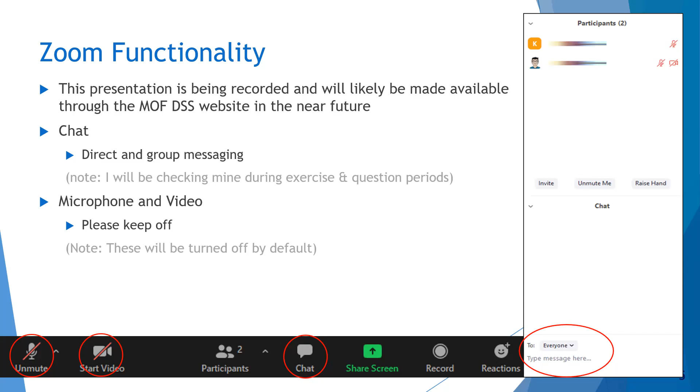So moving forward, webinar objectives. Quickly, the main things we really want to look at: first, review dam regulations. There is some guidance there as well. We want to understand the need for pre-inspection, so that's going to be a real main thing I'm going to try to drive home today. To be knowledgeable about the tools and resources to use, we're going to show you where to find checklists and things like that, and know how to document issues.

So it is a virtual inspection. What we're going to be doing is focusing on formal inspections. It is very similar to surveillance, but that is the main goal here today.

So module content: introductions, we've already done that five minutes in. Review of dam safety regulations - we're going to spend about 15 minutes looking at regulations, and then we're going to review dam safety resources and templates. So where do we find those? What do they look like? What's in them? And what can we expect? And how do we use those?

So dam inspection, review, and preparation. We really want to hammer that home - how to prepare before you go out to a formal inspection. Visual inspection exercise - that's the main core of this. We are going to go through a whole inspection and think about what do we write down, what are those things, what type of follow-up recommendation should we be making.

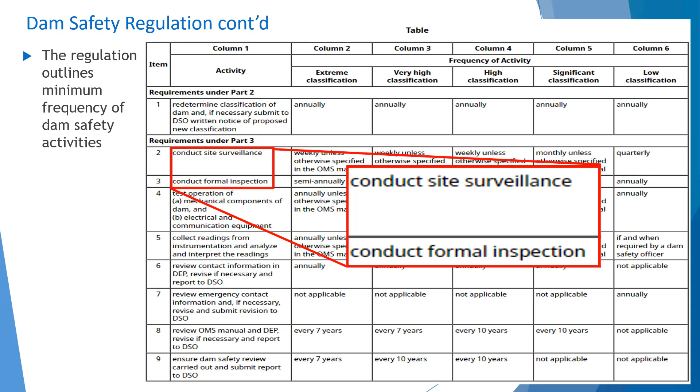That is more of a prerequisite for today. And even if you haven't done it, that's great, or that's fine. It's not going to impede on today's program, but I totally encourage you to check it out, watch those webinars back, and maybe watch this one again afterwards once it's on demand.

So surveillance inspection, right? What is it? What's the difference? Why is there this differentiation between surveillance and formal inspection? Well, generally, they're just surveillance. So the Canadian Dam Association has a section called surveillance and surveillance procedures, and it just lumps all inspections and everything in there. But we know that there's various levels.

We have weekly sort of checkups, or where we just look at them. We have sometimes video surveillance, things like that. Sometimes even flying drones out and doing it remotely. So surveillance, our dam safety regulation in BC separates out site surveillance and formal inspection.

So one is the monitoring of a dam and surrounding or adjacent area to a dam through visual observation. If there is instrumentation related to the dam, through systematic collection of that data. This might be like an operator's stop by, you stop by once a week, once a month. This is a regulated thing. You have a frequency in the dam safety regulation you should be following as a minimum, and you collect that information.

But formal inspection here is a little bit different. It is a thorough on-site inspection of the dam and dam site conducted by a person. These are right in the dam safety regulation, and it says we have to do that typically annually. But some dams it's not annually, it could be biannually, and in some cases even more, but that's a minimum.

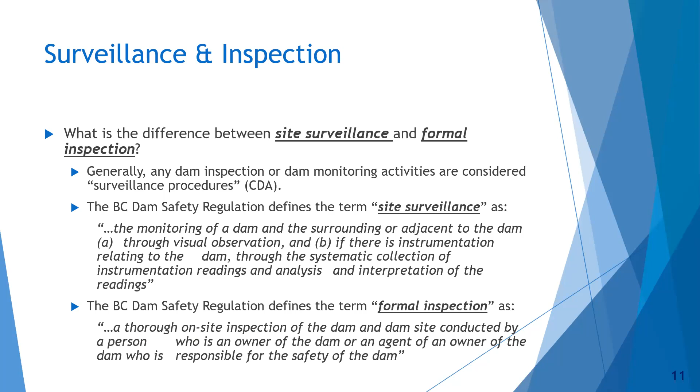Okay, so continuing on. Surveillance and inspection - there is a difference in terminology sometimes when we look at the Canadian Dam Association and our BC regulation. So the CDA just calls them routine inspections, sort of those little checkups. Our BC Dam Safety Regulation calls them site surveillance. So engineering inspections is what the CDA calls them.

We recognize that you're not necessarily engineering. A lot of owners are experienced with dam safety and are going to these webinars, and they know what to look for. You can conduct the formal inspection yourself, and our regulation calls them formal inspections, and that's it.

So we also have audits. Audits are a common thing as well. Our dam safety officers audit us once every 5 years, and so those look like surveillance or inspection sometimes, but those are not considered surveillance. That's just a check or an audit to make sure we are doing those things.

So site surveillance typically conducted by dam owner. Formal inspections, oftentimes conducted by an engineer, by a third party. Oftentimes we do them on behalf of our clients. But the truth is, the owner can do that.

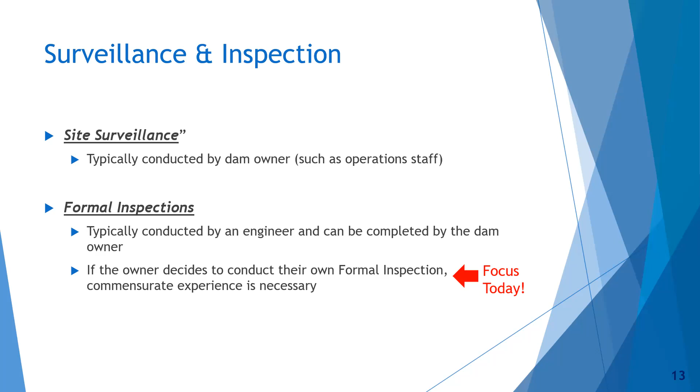So you as dam owners and operators, if you have some experience and you believe it's appropriate, you can go ahead and do them yourself. There's no requirement for a third party or an engineer to do that. Oftentimes I recommend, if you're not sure, have an engineer do it, have them walk you through it, and then they've already filled the first one out for you, and then you have a pretty good idea as to what to look for and use these resources.

So surveillance and inspection - this is right out of the Canadian Dam Association. Dam failures are often preceded by warning signs. The warning time can range from days to months to even years, or it could be minutes or hours. So without surveillance or inspection, we just never know if there's something going wrong with their dams. So we have to be surveillancing them.

A comprehensive visual inspection can identify most issues related to dam safety, and I'd say this is very true. We do comprehensive dam safety reviews, and we do geotechnical tests and drilling and everything, but the most valuable way to review a dam is often just with your eyes. You're looking for things like cracks. So I think a comprehensive visual inspection is probably the best thing you can be doing.

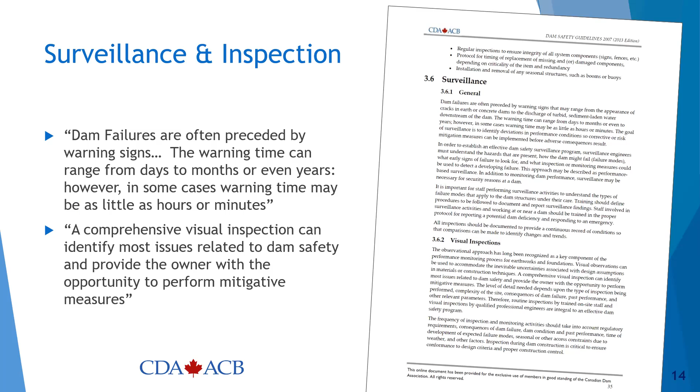And so you should really be doing it at least annually. The frequency of inspection and monitoring activities should take into account regulatory requirements, consequences of dam failure, past conditions, time of development of expected failure modes, and weather. So there's all these things we should be thinking about and have in mind as context when we go out to do surveillance or inspection. Although we're focusing on inspection, it applies to everything - these are all CDA guidance things.

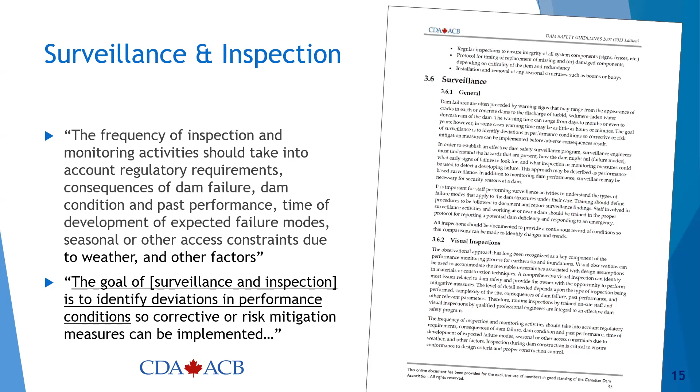Here's the goal of surveillance and inspection: to identify deviations in performance conditions, so we can do corrective measures. Corrective or risk mitigation measures can be implemented - that is the goal here. We're not talking about techniques, but we are talking about the importance of surveillance and inspection.

So lots of stuff about the dam safety management system - there's many things in there, right? We've got reporting, third-party dam safety reviews, operation, maintenance, surveillance, emergency preparedness. We've got all kinds of things, right? And so we've just highlighted surveillance. Surveillance is just one piece of that puzzle.

And surveillance and inspection might be the most important part of your policy. So that's something we just really got to be doing. So we're going to be doing one today.

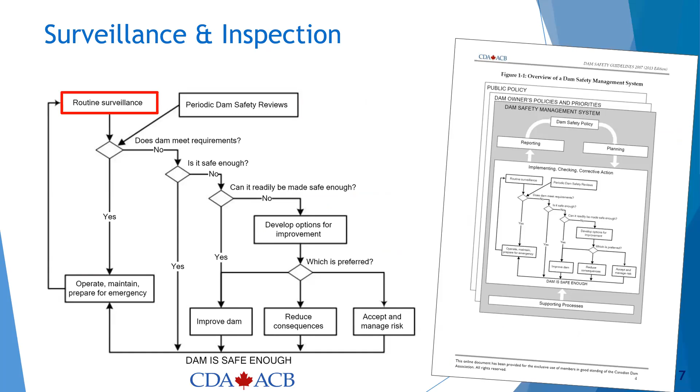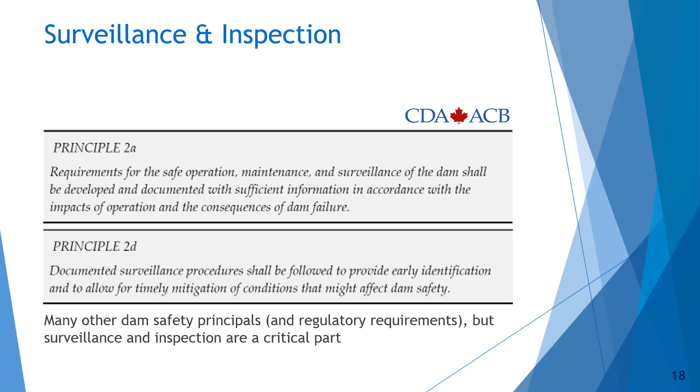Again, this is just another slide to show you the overarching picture. Our dam safety management system includes many things, many things. But routine surveillance is right there at the top - it often is one of those links that keep everything together and working. And there's principles in the Canadian Dam Association, and good reasons as to why we should be doing these things. So I'm going to keep moving to stay on time.

So dam safety regulation, going back to that - we have that table of activities based on your consequence, which we reviewed last week. You can see the frequency that we need to be doing things - oftentimes weekly, quarterly, and so forth. We see conduct site surveillance in here, and oftentimes it's annually for inspection.

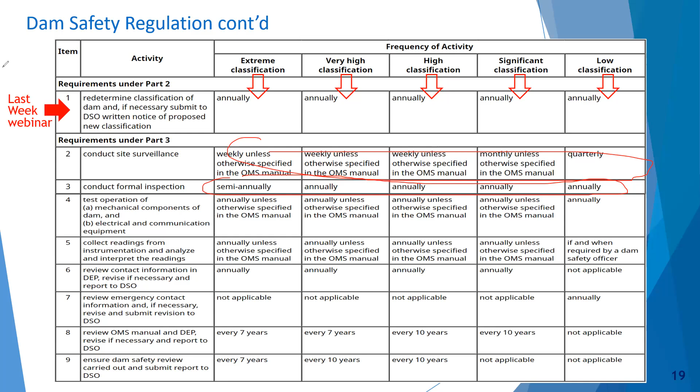Just letting people in.

Okay, and we'll see some other things too that while we're doing an inspection, we can do them at the same time. We can double check and review our consequence, we'll be conducting site surveillance - it certainly overlaps. Some other things too: we can test our gates, test the operation of things, collect readings from our instrumentation. So these are all things that we're going to knock off 5 things of maybe the 9 we have to do, right, when we go out there.

So that's dam safety regulations. Didn't spend a lot of time on it, but we wanted to run through that and give everyone an idea of where all this is coming from. And again, I recommend you go back to our other online webinars. They are linked all off the BC Dam Safety website, and you can learn more about all the other things you need to do in your dam safety to maintain your dam safety management system, to make sure it's robust.

So dam safety resources - here we go. You can just jump right on the website, just Google BC Dam Safety. Your first hit will probably be the site. If you use the keyword resources or technical resources or something like that, you will find this page.

And under each category, you can just pull off this stuff. So right here, we have the maintenance of dams manual. That is what we've covered in the past - it really covers the techniques, what things look like, you know, what's a longitudinal or a transverse crack in a dam and what that might mean. So these are all things you definitely want to be checking out.

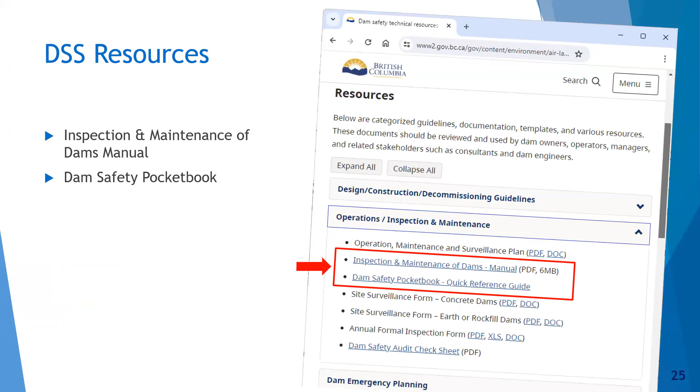So, okay. So the dam, what is this? My apologies. I just need to clear this. There, I had a note from this morning somehow pop back up. Okay, there we go.

So training workshops and webinars, talked about this lots already, probably said it three or four times, but if you go on there, there's also the education and training link. And there's the past, those three ones I would highlight specifically as ones you want to check out before going out and doing your own inspections.

So the dam inspection, vegetation, animal management techniques, that's a pretty good one, lots of common problems people have that we address. Surveillance and inspection is the main one from 2021.

That covers really the content of that manual and that little guide booklet. And dam performance monitoring, instrumentation, data analysis, we dive quite a bit deeper into what are we looking for when we're collecting data from V-notch weirs, from piezometers, things like that, and how do we analyze them. So those are some of the things that are in that list of activities we should be doing as part of the regulated activities.

So those things, we show you how to do that and what that looks like. Check those out, those will help you in doing what we're going to be doing today.

So off that same link, you can download these templates. It says it is recommended that you customize this form for your dam, so all of your dams will be a little different. This one happens to be for concrete dams, so if you don't have a concrete dam, or maybe part of your dam is concrete, you may want to use part of that form.

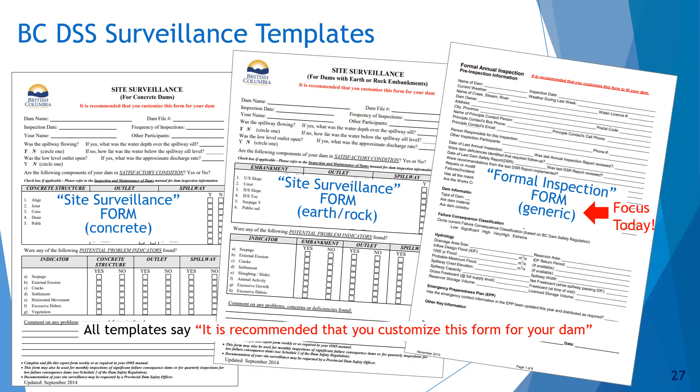We're going to get into the virtual inspection soon, which is quite a bit more interesting than the regulations and the templates. But anyway, when we want our field inspection to go smoothly, one of the things we recommend is, if you don't have a concrete dam and you have an earth dam, which is most of the dams here in BC, you're going to want to blow this page away.

Little things like that really simplify your walkthrough. There are other subsections of things, like if you're doing inspecting your spillway, and there's lots of different things in there in the spillway template. So if you don't have a big concrete conveyance section, you might want to blow some certain sections out to really simplify it for your dam. Because again, if it's not simple, you're probably not going to be doing it. So you want it to be useful, something that's easier to look at when you go back to it.

Another recommendation we have is, because we have to redetermine our classification every year, oftentimes the one time we're on site doing a thorough inspection per year is our formal inspection. So I recommend adding something like this somewhere in your template, and we'll show you that in our example. Basically, you just go through and do your check with maybe 2-3 questions: is there a record of the dam classification determination on file, and is it supported? Yes, right? Then you can follow up by saying it's still appropriate, and putting some notes on your formal annual inspection. That way you have a record of your annual review of classification. We spent a lot of time on that last week, but this is a really great way to simplify that process. Once you have a determination and have some clear rationale on file, this is a great way to show that you have checked it at least once in any particular year, and it's easy to find.

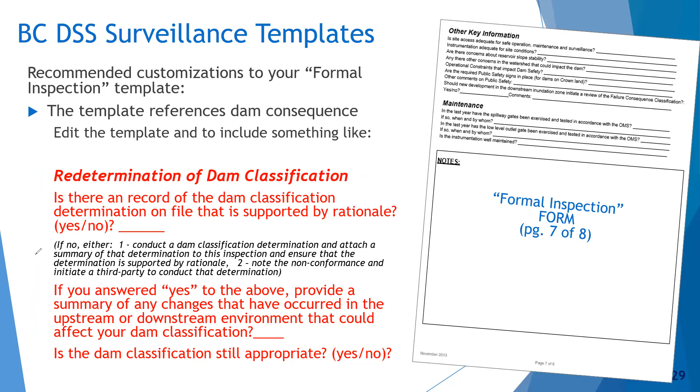So, next slide. Inspection review.

We said we're not going to cover techniques, but we do want to do a very quick review of some things before we dive right into a virtual inspection. So here are some of the main components of a dam.

So we've got the crest. When we're talking about the crest, we're talking about anything sort of in here. We're looking for irregularities like differential settlement, which could tell us something about maybe we're losing material from internal erosion, or maybe we're having excessive settlement where our foundation's failing, and it could be causing cracking depending on the type of material we have. So there's a lot of things we can look for when we look just visually at our dam. We can stand here with our legs and arms and body kind of below it, and eyeball that crest. We can see, is this level? These are all things we can do quite easily. But when we do our formal inspection too, we go one by one through all the pieces so we don't miss anything, and it reminds us to think about those things when we're on site.

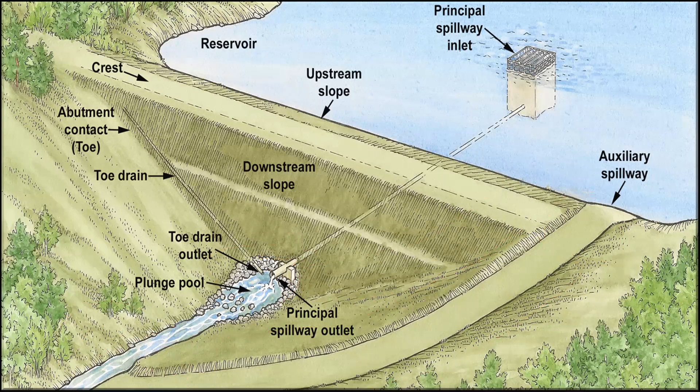So anyway, just a quick background of some of the areas, zones, and typical features of a dam that we're going to be covering, and it's certainly similar to the one we're going to be reviewing.

Transverse cracking—that could be from foundation settlement. There's lots of different things that just a visual look can tell us about what's going on with the dam.

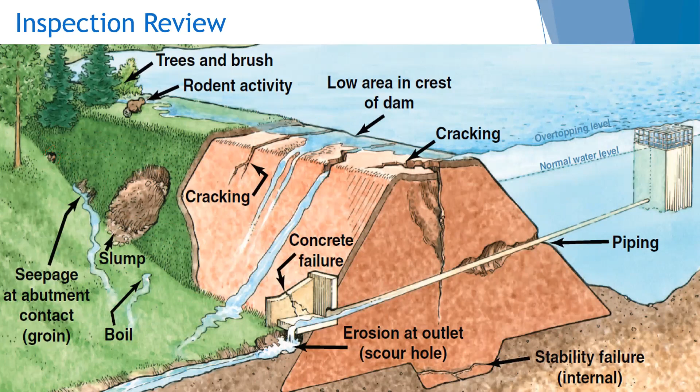Quick snapshot—this is some stuff that we cover in the other webinars. So we talk about all these different types of modes of failure, things that can go wrong. And these are the things we're looking for, right? And they happen over a long period of time.

Like this one shows vegetation. We see debris accumulation—this might be debris accumulation, or all these burrows, excess vegetation. Lots of things, the erosion on the upstream slope. These things happen very slowly over time, and so if we're only looking at the last little bit or the last inspection, it can kind of normalize over time.

So we want to be thinking about what our dam should look like, making notes, identifying problems, and following up. Again, the goal for a formal inspection is to just identify the problems and then provide an outline recommendation so that we can follow up.

So here we go—going back to my last point, we want to be thorough. This really applies to both the upstream and the downstream slope. We're going to go through quite a few photos in our virtual inspection, and some of them kind of give a pattern like that. We don't have a lot of photos, but typically this is what you're going to want to do.

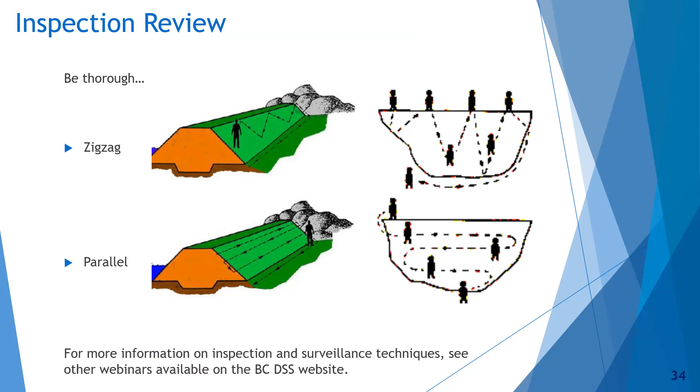You're just collecting information. You want to understand what's going on, how your dam is performing, and where to look before you go out there, so that the hours you spend out there are very focused and you are identifying things that are a problem.

Okay, inspection prep. So that's what I started talking about. Inspection preparation. This is from the CDA, so they have slightly different terminology.

Formal inspections are typically performed annually or semi-annually. We saw that on our regulated table, right? It's even in our regulation here in BC. They include a detailed visual examination of the dam and the instrumentation used to monitor dam performance. This inspection should document observations regarding the condition of the dam, with any significant condition changes from previous inspections being highlighted. How would we know that unless we do some preparation or review, right?

You can't do it if you don't have some knowledge about past conditions. So some assessment of the severity of observation or observed anomalies, as well as recommendations for maintenance, repair, investigation, and further monitoring should be completed. We need to be able to, supported by visual and background information, assess the severity. We're going to be doing that a little bit today.

So what does this include? Well, it includes visual examination, which can be much more useful than even these very complex technical seismic checks and things that we do. Visual is sometimes the most useful. So it includes visual, it includes...

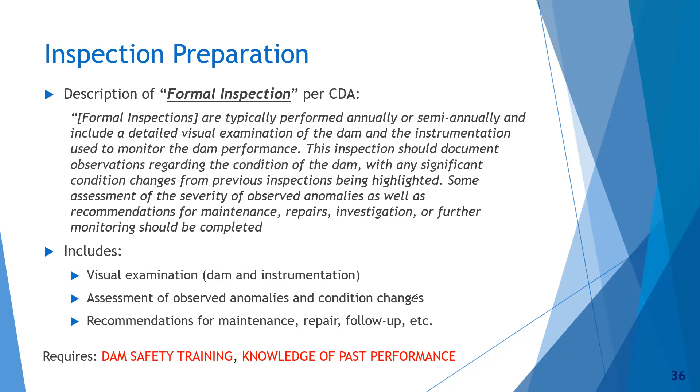We need to understand past performance. Zeneca said previous inspections. Absolutely, people have already done this work before, right? It's kind of like copying your neighbor. Derek said last year's formal, last DSR, and audit. These are all things they probably have reviewed and looked at, so we understand the condition, and it's always a snapshot in time. Even that will point our direction to where there are already known issues.

Someone said previous notes. These are all absolutely the types of things we want to look for. Let's see what else we got. Someone mentioned DSRs. Yeah, we can read about failure modes and all kinds of things that give us more context as to how our dam could fail and what we should look for.

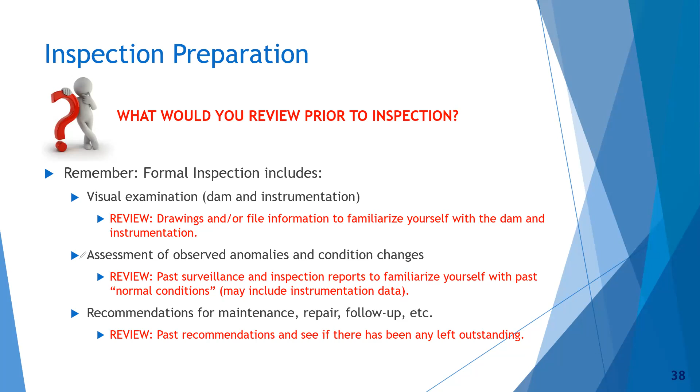Sometimes it can be rapid, but we're looking for changes that can be minute, changes of conditions over time. Remember how these failures can take years, but they could also take minutes or hours. So we want to be cognizant of that - it's all about the condition changes.

So always, always, always review past inspections and surveillance. Always carve out the time to do a screening level assessment, or at least a screening level review of at least 1 year's worth of information. DSRs are a thorough review of everything, at least 10 years, whereas for annual inspections you should at least look at the last year. And I like to review the last DSR.

There's even questions on the template about the last DSR, so we get some context for the last 10 years. We know exactly what it looked like a year ago, but then we have a sense of how much it may be deviating over a longer period of time. Hopefully you have a lot of understanding about that dam and can review pictures from longer ago.

And if we don't have experience or know the dam really well, or understand the design or the typical performance, this initial preparation time is going to go up. So if an engineer comes out and is going to spend somewhere between 4 and 8 hours at your dam, they should have at least 4 hours of similar review time. If they can do the inspection in 4 hours, they should have at least 4 hours of review time. That's a lot of time, but it's also very proportional to what you have on file. Some dams are much more complex, have a lot more information, and so forth. So regardless, if you're inspecting your dam, you always want to be knowledgeable, and that amount of time is going to change.

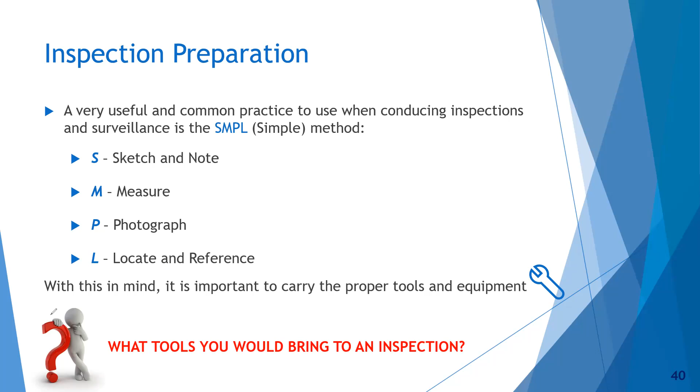There's a question too we were talking about before, what tools to bring. So I'll open up to questions. Dave, you already answered, some other people have already answered, but what are some things you would want to bring?

And we're talking about tools here. Obviously, you want to be bringing things to wear. If you got to get in the water, bring waders, bring boots, bring warm clothes, but more the tools you would bring. If we got to measure things, we're going to bring measurement things, but the drone was a really good one, and the batteries. What else do we have here? We had someone kind of just saying, and materials.

I guess it really depends, right? If you do your preliminary review and you've got piezometers, you're gonna want not just a measuring tape, it often doesn't fit in the piezometer. You're gonna want a water tape, obviously a measure tape. If you've got drains, seepage drains that you want to measure, you're going to want to be able to measure that. Maybe a stopwatch and a bucket.

Someone says connectivity sensors for on-site piezometers. Yeah, so if you don't have a simple standpipe like a water tape, it could be vibrating wire or it could have some sort of logger on it, and you need some sort of either wireless or USB connection device. Make sure you update your software sometimes prior to going, if you have something more complex like that and you don't have Wi-Fi up there.

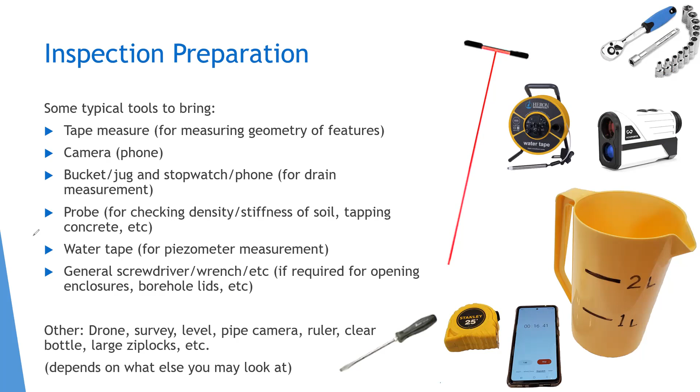So yeah, camera, bucket, stopwatch, probe, water tape, screwdriver, tools, drone. Oftentimes, if you have special cameras or anything that you need to look inside of a vault or whatever, you might want things like Ziploc bags and stuff if you have some kind of sample of water or material, metal detector, for locating, like if you're going to collect survey and do a monument survey, that's a little bit more maybe than a formal annual inspection, something separate to it that supports it. But you might want to do that at the same time. You go out there, you got to find all these things, you got to measure them and so forth.

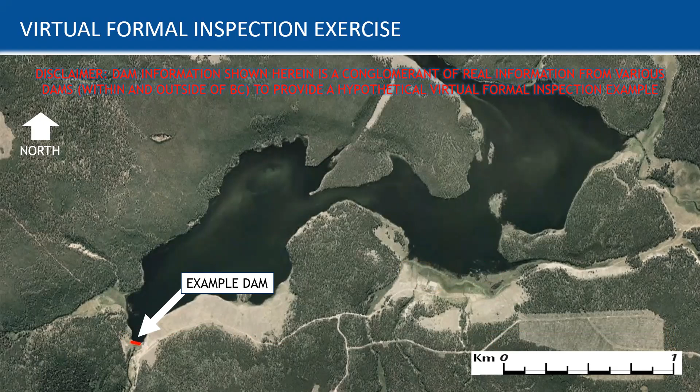So we've got some shallow areas in here. We're just trying to kind of get a sense of the site. So, next question, next slide.

There's a picture of the dam, right? So we're looking at something kind of like this. We're zoomed in, and so we're gonna be reusing this little screenshot to show where a photo is as we go through this.

So as you, the inspector, arrive, when you arrive from this side or this side, and walk around and maybe do your Z pattern and stuff like this, what I'm going to be doing is I'm going to put this image up here on the left, and then I'm going to have a little arrow, for example. If it's something like that, you'd be standing here, and you're looking this way, and that's what the photo on that slide is going to look like. So we're going to do a walkthrough inspection of this hypothetical dam.

What we might want to write down, things like that, as we go through an inspection. So we're going to go through some background sort of information to try to get a sense of this hypothetical inspection situation. So just here are my notations. Okay, just making sure everyone's in.

All right, so remember, what do we always, always, always do? We start with a screening level review. So I'm just going to take a second. So we review past inspections, past surveillance, maybe past audits, all those other things we talked about. So these are kind of the main things: past inspections and review, and everything else we can find, at least 1 year back, right? And I would say if you're not the owner, you obviously want to go much further back because you don't have that knowledge, even if it's not fresh. You really need to probably spend more time.

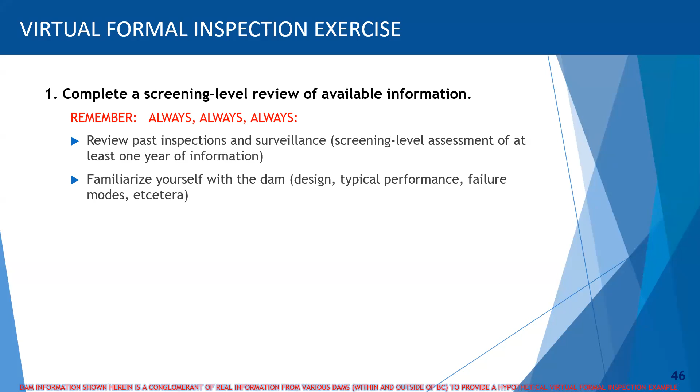So familiarize yourself with the dam too, right? Even if you know the dam or think you know the dam really well, double check the drawings. Maybe print a couple copies, shrunken down to an 8.5 by 11, so you can bring them out and sketch on them, locate issues, and just remind yourself what it is you've got. And do engage. Everyone's got, if anyone through this example has questions or they have suggestions like, hey, do this or that as well, do jump in.

So we're going to start doing sort of background investigation. Here's some information. Let's say the dam was built in the 80s. It has a catchment of say 300 to 400 kilometers squared. So, I mean, if you know the dam and it's your dam, obviously you're going to have a sense of how big that is. But if you don't know anything, and all of us, none of us know anything, we got to think about that.

Okay, a dam that has 2 square kilometers gets a little bit of flow. Well, the bigger it is, the more flow it gets, right? So we're starting to get a feel for what it is. How big is this thing? Okay, is it maybe 9, 10 meters by 100 meters? I can kind of gauge that. If it's in feet, call it 300 feet long, maybe 25 to 30 feet high, right? We've got some slopes here, how steep it is.

We've got dam design information. We've got some provincial record drawings. Okay, so we've got some drawings. We've got some instrumentation sketches, right? So we know we have instrumentation on the dam. We've got some, let's say it's been fixed up at one point, so some work was done on it.

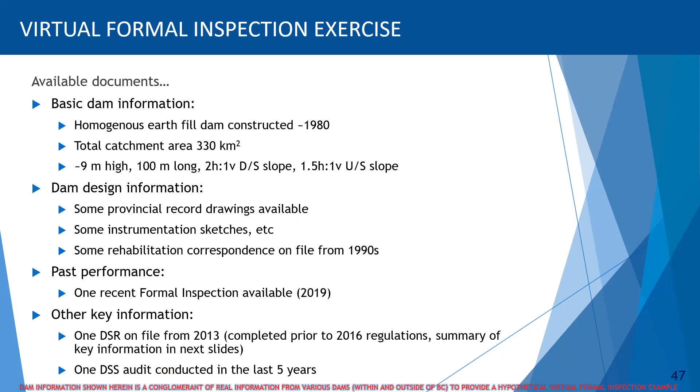What else we got? We've got, let's check out the drawings, right? So, okay, on we go. Trying to think if there's anything else I want to point out. No, I'd say that's about it.

So this is kind of that same reservoir and image we looked at, right? It gives us an idea. Okay, we've got concrete there, so we might want to be thinking about different tools to bring. We've got maybe some monuments that we want to measure. Someone mentioned survey, but if someone else is doing that once a year, quarterly, or however often you do it, maybe it's only every 5 to 10 years, or post seismic event or something like that. So we might not need that. Anyway, we want to start thinking about this critically.

Now we got north going this way. What else have we got? Anyway, we know how to get there, hopefully. Someone was talking about being prepared - some sort of benchmark for a water survey, perhaps. So anyway, some tips as to maybe where we could find some background information and so forth. Anyway, that's our site.

So now what is this, we're looking at this dam a little bit more now. So before we inspect it, okay, so to start, this would be a great page to print. Even if you sort of crop it like that, print that 8.5 by 11, you can mark it up, right? So if you're down here and you're like, oh, I see seepage here, there, I can just mark it here and be like, see note, right? See note on my formal annual inspection checklist, right at the end.

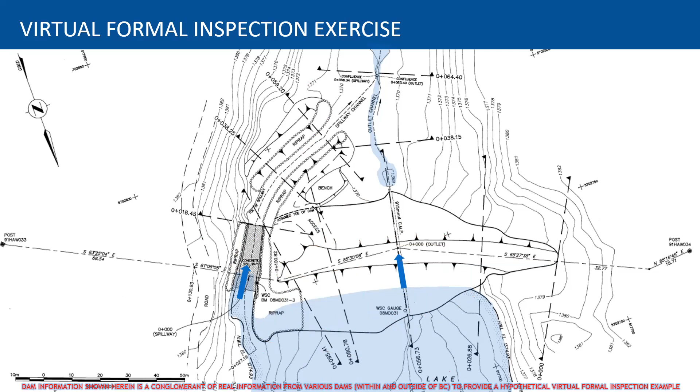Okay, it said there were some instrumentation sketches or notes. So at some time, a borehole was put in, and this might have been a test pit or a borehole as well. It shows - you say water level up here, got a water level here.

I don't know where it goes. We might have some notes where there's been seepage in the past, so we get a sense of how this dam works. We've got glacial till for some of it. It's very generic in terms of detail, but it gives us a little background. One thing we know is we have a borehole and some instrumentation we could measure, so we're going to want to bring a water tape. We might want to bring tools to open this thing up, or maybe it doesn't need tools, but these are things we want to think about before we go out there.

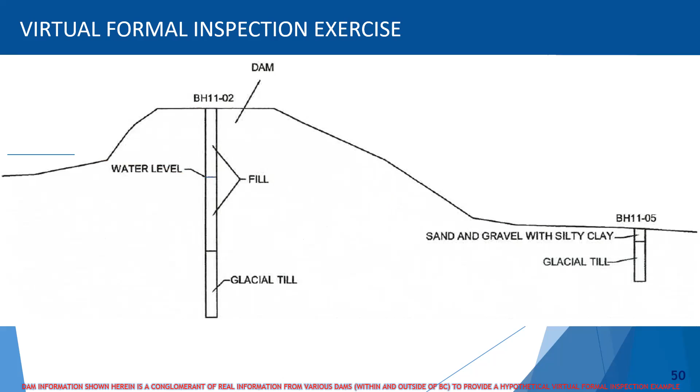If we have the dam safety review on file, it might tell us a little bit about potential internal erosion, things we might want to be aware of. It gives us a sense of some things we might want to know about before we go to the field.

So low level outlet is aging. It was built in the 80s, so what does that make it? 40 some years, 45, maybe it's older. But some things we want to think about.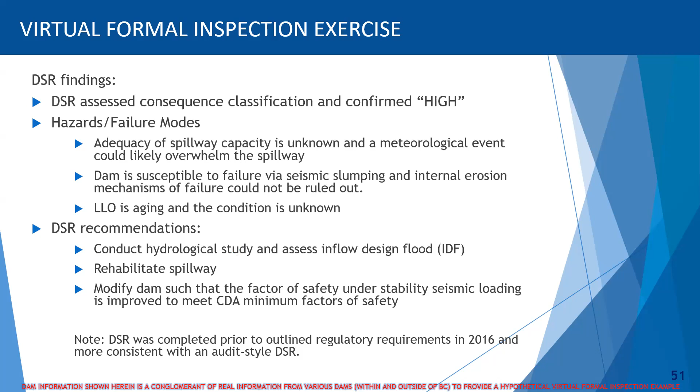Let's look at, if it could be potential, only under seismic though. To my knowledge, maybe no seismic event has happened out there, probably no slumping or cracking or anything from a seismic event, but it might be a little steeper. So we're going to want to look at embankment stuff, and there's lots of background types of things we want to look for. And we also want to check out that spillway. So nothing really else stands out to me for this.

So some anecdotal information - there's been a recent wildfire. What else? Operators said they've never seen more than about a foot in the spillway, so it kind of gives us a sense of what flows through the spillway. This is pretty typical - some thoughts of maybe getting more water. The standpipe was installed sometime recently, so some things have happened in the past, some new gates. So there's some new stuff, stuff's getting repaired.

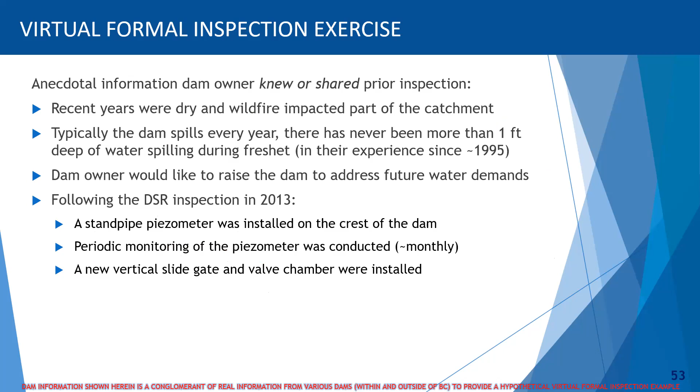So now we're going to jump into the inspection. We've essentially gone through all those past things, and it takes time to pull out those things. It still took us a good 5 minutes just to review the summary bullets, so you've got to find these documents, pull them all out. Now it gives us some information, so we're going to pull off a template.

It's a slightly different format from the Excel document that we can customize, and we're going to try to fill everything out ourselves. You can always hire someone to help you do it the first time, since there are a lot of questions that might be hard to fill out. It's okay to write unknown or not applicable, or if you're customizing this table, you could delete it. But the more information we have, the better.

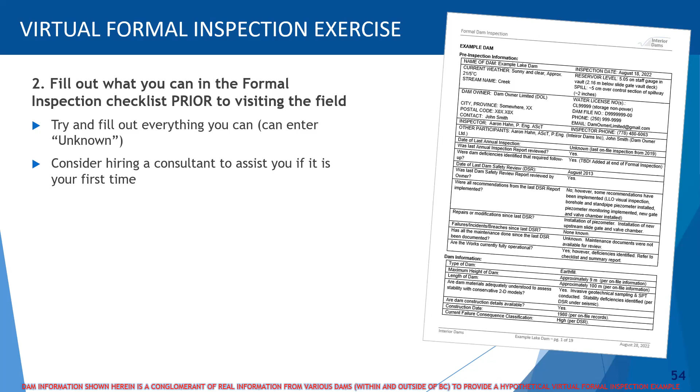So this is what the form looks like. We start out trying to get all the information we can from past records. We measure a couple things when we're out there, put a date in, and let's assume this inspection happened about 2 years ago. Again, this is all made up - John Smith, we've got a past DSR, and some notes from the DSR. We're really just summarizing what we just went through.

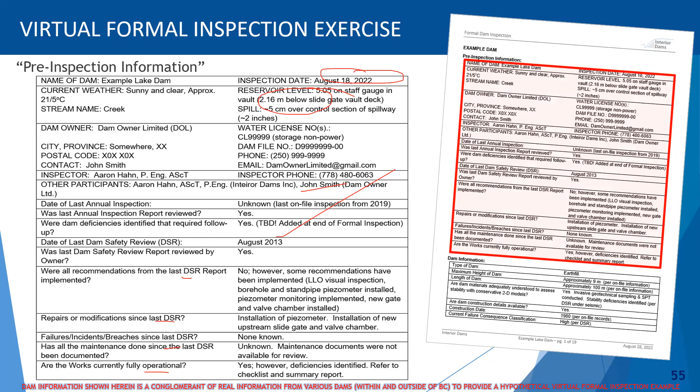So what else have we got? We've got a summary of some of the information. We did have some invasive investigation. Are the dam materials known? These are starting to get hard questions. If you don't know what to look for, you could just write unknown here. Some stability deficiencies were identified, and seismic was one of them.

Are dam construction details available? Yes, some details - we had the drawing, and some information on construction date and current consequence. This is all stuff we just learned, so it's not that exciting yet. We're not at site yet, but it's all stuff we've got to do.

The next section of this template is redetermine dam classification. We added this - it's a custom addition, we changed our file. Is there a record of the dam classification information on file? Sorry, something's covering my screen, I can't quite read it. Yes, the DSR. So we said based on local knowledge, nothing changed.

Upstream and downstream environment - is the dam classification appropriate? Yes, we're done. If for some reason this had a no here, we told you last week how you can come up with your own assessment, and you might not necessarily need a complex dam break assessment - you might be able to do this yourself. The dam looked pretty rural, so maybe we can do this ourselves, and then this can be yes next time, meeting all our requirements under the regulation. So that would be sweet.

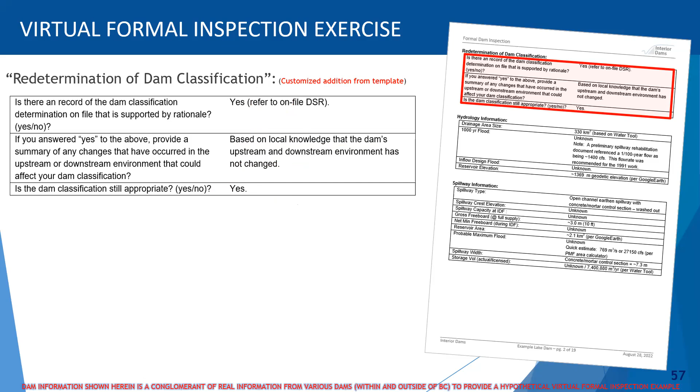Just wanted to show you this quick customization, because that checks a pretty big box off our to-do list, number one on our to-do list. So what else do we got here? We've got drainage area - let's say we didn't know what the 330 was.

We could have used something like the BC website, which has a water tool. Just Google BC water tool. For a lot of our regions, you can just click on a map and it'll add up your watershed catchment. So even if you don't have that information, that's really useful.

Sometimes it asks things you might not know, like the 1,000-year flood or the inflow design flood. Some of these start to become dam terminology, no pun intended. If you're not sure what these are, you could always have a consultant fill them out. In this case we didn't have any information on file, but we had some preliminary information from 1991 when they did some rehab work - remember, you said in the 90s they did some work, so they had a 1 in 100 flow from back then. If you're familiar with CFS, anyway, just some background info that we're filling out here, giving us context.

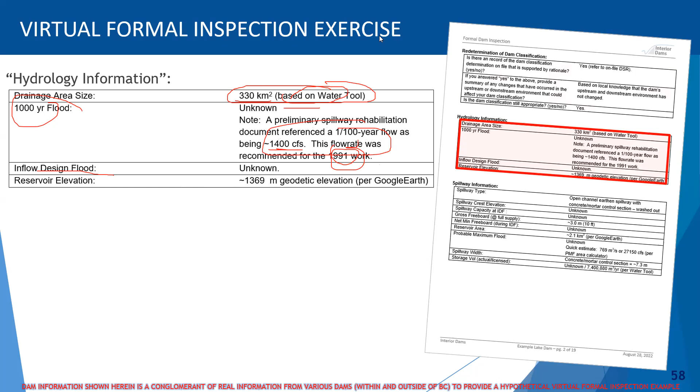So let's keep going. We just put some spillway stuff in here - real simple stuff, you're out there already measuring. Some of these you'd have to physically measure if you don't have them on drawings. We didn't know what a probable maximum flood was, but there's a little calculator that, as long as you know the area - and we knew it was 330 from the previous slide - you can just punch it in. It's like a tiny formula, and it's super coarse. But it is useful because it gives us a magnitude of the type of flood we might have to design for.

Also be mindful, probable maximum flood is only used on an extreme consequence dam - you would not use that on something like a high consequence dam. So it would be way bigger than what we'd design for, but we're going to end up with a pretty big spillway size. So what else do we got?

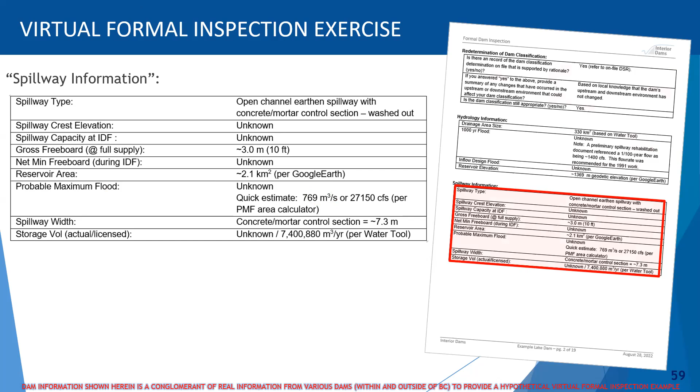Okay, so we finished all the background stuff. We filled out all the background information. We already did the review of all the background information. Now we get to do sort of the more fun thing. Just think about that.

We've spent most of our time on this webinar just flying up to this point, and I've got to keep moving. So focus on where you think the main issues might be, and this is the thing you wanted to print.

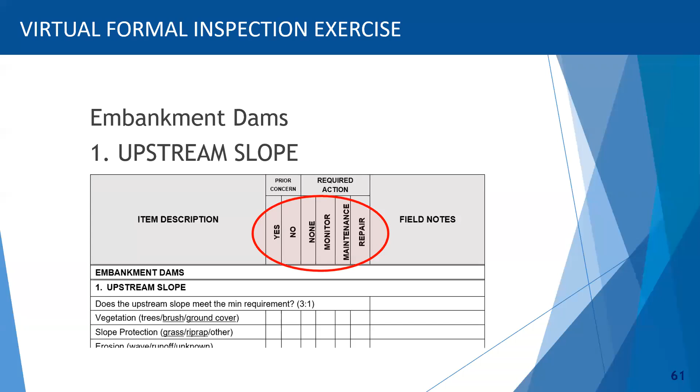Okay, next slide. So this is what we want to fill out. We're walking around, starting with the upstream slope, and it's broken up into sections. Please, everyone, we've got to move through this pretty quickly. If everyone can just jump in with the chat, I'm going to be moving through these probably about 10 seconds a slide. So everyone look through here real quick.

Do you see we're standing up here on the dam? We're looking this way. Does anyone see anything that's a problem? Start making notes, and as I move through at about 10 seconds a slide, just start firing things in there, and then we're going to see what kind of stuff comes up.

We're seeing vegetation. Someone said debris. If you remember the drawings, that's kind of where our spillway is. We see a bit of a log boom here - actually it's probably more that it was connected up to here at some point, was broken, but it's kind of in front of the intake. Looks like erosion on the spillway.

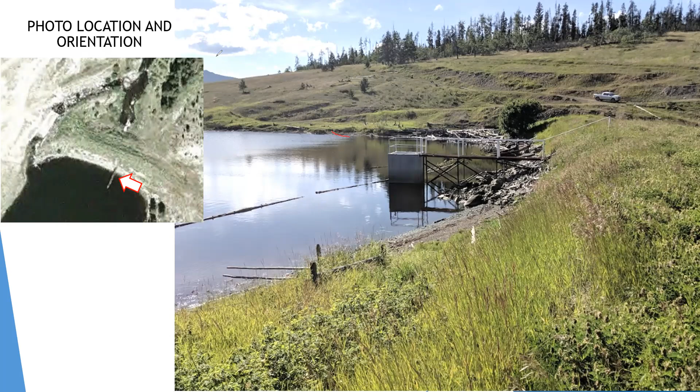Someone said, okay, let's keep going here. Everyone monitor the chat too, right? I won't be able to say everything in a second, so everyone just start firing things in there.

Right, now we're looking back here, toward this upstream sort of intake gate. We've got a walking bridge or gangway, mechanical valve up there. Remember, we're still focusing on upstream slope. So what all do we got here?

Okay, now we're standing on that thing, and we're looking at - we always want to have our orientation looking downstream, left and right, right? I'm starting to run a little bit behind on time here.

So lack of riprap - yeah, we see a little bit of beaching. We see some riprap around the structure. We've got a broken fence. That might not be a dam safety thing, but if you're in cattle ranching, then that's definitely important. But we want to keep them off the dam too, wherever possible.

We see access, LLO, an emergency event possible. Yeah, someone's already thinking about access, right? Is access to the low-level outlet sort of blocked from the spillway? So, all good things - my arrow's a little off, actually that's right.

You're standing on that thing looking toward now the left side of the slope. So we see some riprap. Someone mentioned debris. So now we're walking further to the left side of the dam. Someone mentioned sloughing - if I were to go back on the last slide, yeah, maybe a little bit of sloughing, a little bit of even just walking erosion, maybe from cattle that got in there.

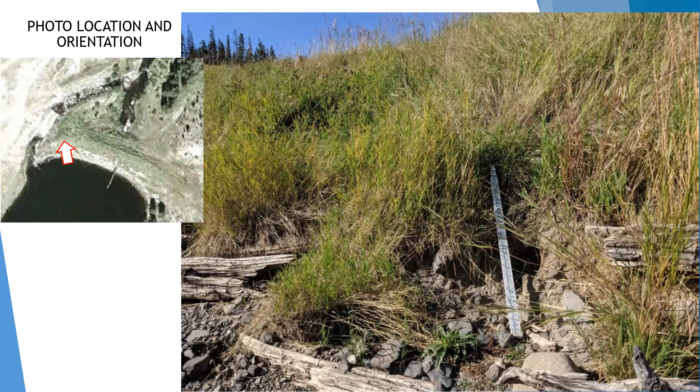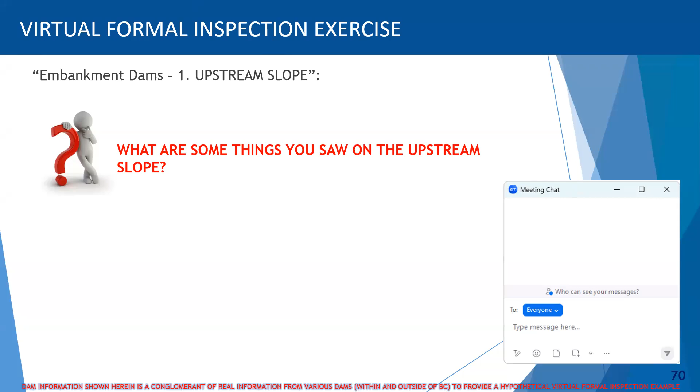Staff gauge bent over - that's actually my builder's rod. I like it because sometimes it helps me walk around like a staff, but it's actually very useful for measuring things. So most of you already answered everything here, and again, I want to keep encouraging everyone to use this chat. What do we got, right? Here's the form - I've kind of pre-filled out some of this stuff. Slope protection.

The riprap has been pretty displaced, and we see quite a bit of wave action. We had a pretty big reservoir, and we got a lot of wave action. I think we have to check off one of these things. I think it's appropriate to say repair because we have a pretty big burrow in there. We've obviously probably haven't had a major wind like a 1,000-year event before, and we are seeing quite a bit of erosion.

So we see some other maintenance items here, and essentially this is all - I don't want to go over every detail, we're not going to make the time, but we want to go through this. I like highlighting each box because it helps us look at it again later, since we're going to review this again next year, and this helps us pull out those recommendations.

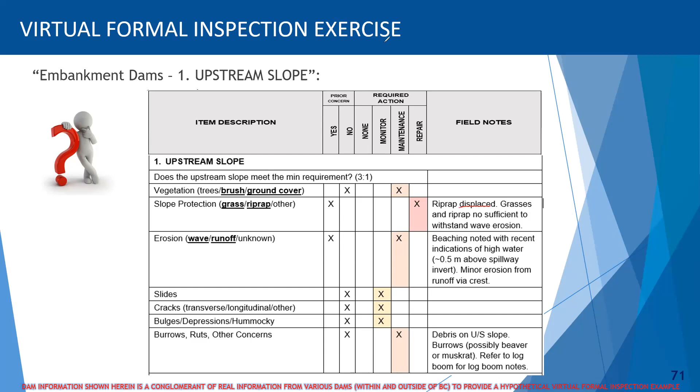So now we're going on to the crest. We're kind of looking over the spillway right now. This is the crest we filled out on the drawing, and that's what it looks like here. It's nice, thick, established grass that helps with erosion, but sometimes it makes it hard to see.

Everyone keep talking - someone said maybe slumping. Yeah, and this could have been mechanical equipment access too, right? This could be a little bit of erosion or slumping, but the drawing showed riprap, I think, so it could just be the vegetation growing through the rock riprap. But yeah, again, we've got a little bit of vegetation there.

So everyone keep chiming in. One thing I noted here is, we're looking right here - we should be able to find a golf ball. So we found a little elevation monument, and it ends up there are quite a few of these things.

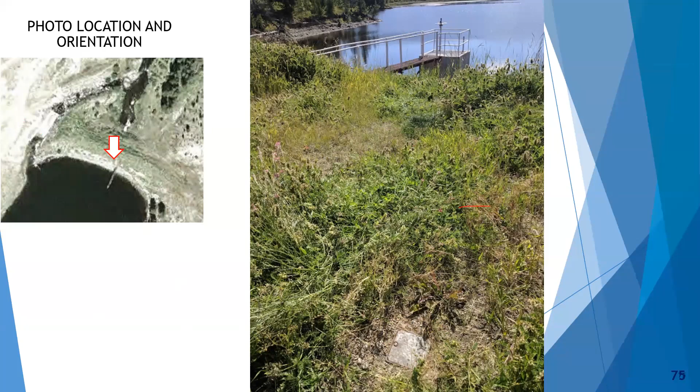Tree growth on the downstream slope, absolutely. One thing we noted too is we found that thing, right? It's the borehole - that's our one standpipe piezometer. So while we're up there, it's hard to find golf balls on this one, but you should definitely be able to find that, and hopefully any survey monuments.

So we pull our water tape out. Let's say we get 7 meters, right? Let's say it didn't appear to be any different than our expectations.

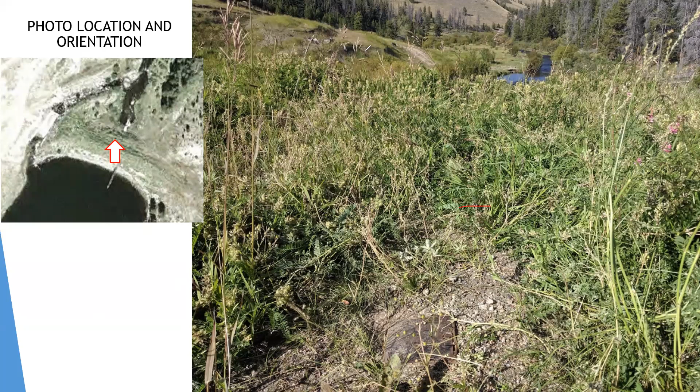There's just another photo, we're looking downstream. That's that same monument - again, think in your head what might be there. We've got it looking relatively flat, we're kind of looking on the downstream. You can see that fence that someone said might be broken or just doesn't quite make it to the reservoir. Okay, so this is more standing, a little on the downstream slope.

You're trying to catch an eyeball along the top length - see how hard it is? Someone said vegetation, right? Vegetation really obscures your inspection. That big rock is almost completely hidden - you should be able to see that and not trip over it if you're looking thorough enough, but it just goes to show you, if you can miss a big rock like that, you're probably missing other things too. So vegetation is definitely something we see.

We're on the right side - no contact information signage. That's a good point, that is absolutely something we're going to want to look at. On each side of the dam, if you can access both sides, usually there's a sign. So great comment, Dan - that's one of the real sneaky ones that will end up on this.

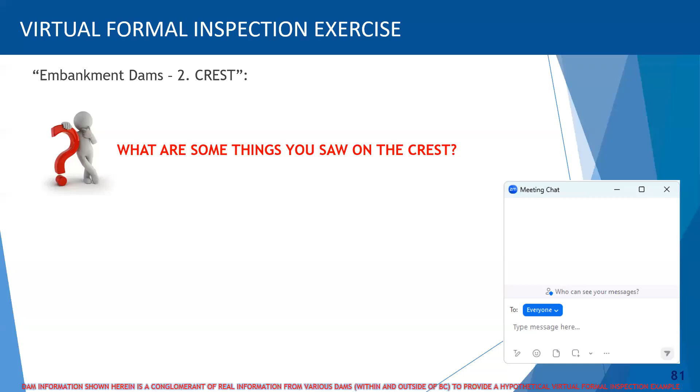So what are some of the things you saw? I think everyone got everything, right? Is the sign marked? I didn't think anyone would get that. No, right? So we want a sign on anything that's on crown. I'd recommend it even if it's not on crown, because if a neighbor sees it, they can grab the phone number, and hopefully save your dam.

So maybe a little bit of runoff erosion, just that was noted - really minor stuff. Where's my slide change here? Maybe settlement - we don't see any, but better monitor it. It's hard to see through that vegetation, right? So once you clear it, maybe we'll look at it a little closer.

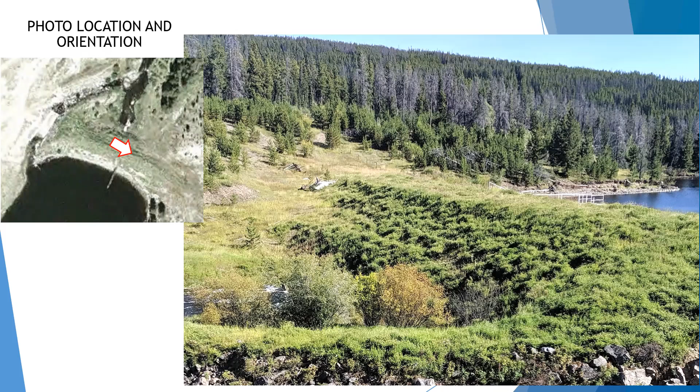Yeah, it's not too bad, but it's more than a foot, right? It doesn't meet that lump, or that rule of thumb that we talk about in our rodent and vegetation management techniques. So anyway, that's kind of where it is now.

This is the same photo as before, but now we're kind of thinking about the downstream, right? We're kind of steep, I think. Yeah, bottom of downstream so looks steeper than the rest. Really great point, Billy. That is something that we're gonna catch, right?

So everyone is, you know what, you're filling this thing out for me. So now we call this the groin, where the embankment sort of connects to the existing ground. That's always an area where we might have contact erosion or other things. We saw in that borehole, and maybe in the dam safety review failure modes, there could be seepage, or there's always potential seepage issues with homogeneous dams. So we really want to be thorough here.

We're walking around looking for wet places. I know we can't feel moisture, but we might be able to see more aquatic vegetation, right? So kind of keep an eye out for things like that.

There's the low level outlet, which is something else we're going to cover in a different section here in a second. But there you see that it kind of goes like this. There was a bit of a bench and then it kind of looks steeper, right? Did we have maybe some slumping? I don't know, right? It's hard to tell with this vegetation, but some great comments.

Erosion around the outlet, absolutely. That's part of the downstream slope, downstream scour, all things we're kind of worried about, right? Someone said vegetation. This is kind of right in our groin, that's kind of right the area we're concerned about.

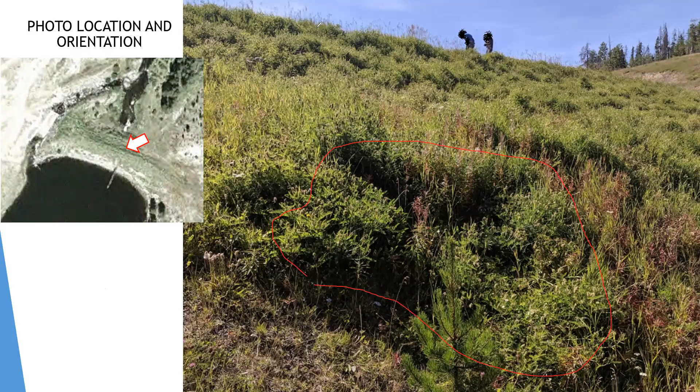We like to see 6 meters, right? The length of a pickup, maybe like 25 feet, 20 feet. We'd like to be clear of everything, right? So there's some notes here we're going to want to take away. Is this kind of a darker, thicker vegetation? Vegetation is our friend because it often provides some monitoring value, right? So we see some of that.

Again, some more photos, and you would want to be doing a parallel pattern probably on this one because it's pretty steep, and it's a little more sure-footed if you're going horizontally. So we're just kind of taking, again here, this kind of looks a little more aquatic in here, and this is definitely sort of that aquatic grasses, right? And we can see it extends, and it probably extends out something like that, right? So these are things that are probably typical from past inspections.

Turbidity, someone's like, is there turbidity? There might be, right? That kind of flow, we probably wouldn't be able to measure it, but we want to look for that. Those are the things we're looking for, right?

Lots of good comments. I'm just going to keep going for the, see we're seeing some wet, squishy areas. So here I left a book for scale, and the next photo shows kind of an area that might have a bit of point seepage here, right? So definitely something concerning that we want to, we definitely want to know that.

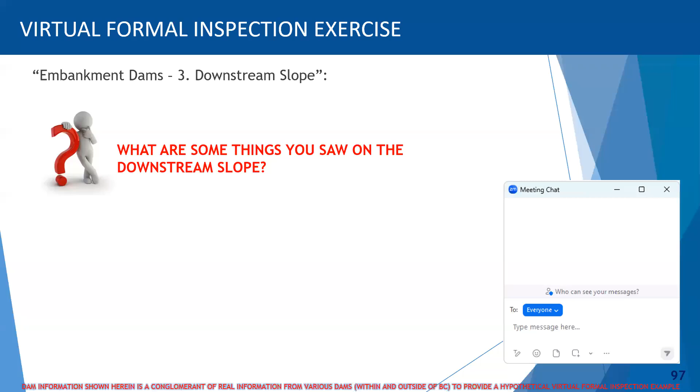So again, stuff that's hard to see, but these are the things we want to think about and write down. And remember, we want to compare to past information. Can we sort of measure, is it saturated to here or is it saturated to here? And maybe make some notes about measurements, because it's still very close to full pool and be similar to full pool conditions.

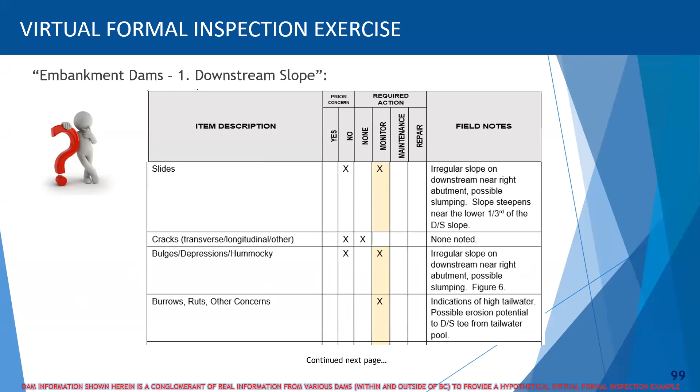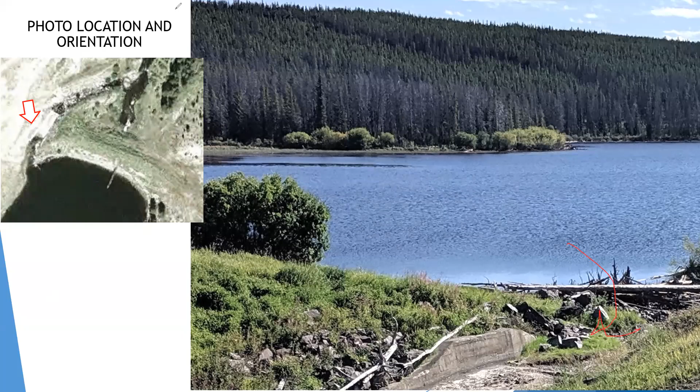So I got to keep flying here. What was the last thing? This is two more little sections, and then we're going to go to conclusion. So, we're talking about the spillway, but we kind of have this spillway approach. I mean, someone's already said debris. We're getting close to the end here.

The log boom's looking a little tired. That's something we want to know. I think this probably went all the way across. Maybe it failed and swung into here, or maybe it was protecting the trash racks. Again, those are dam specific investigation details you would probably know more about.

But we definitely have some log boom issues, right? Because we got no log boom out here, we got a lot of logs in here. So one of the first things someone picked out, our approach channel is looking a little worn.

What else we got? Erosion at the leading edge of concrete. Yeah, we have some missing concrete in there. Unfortunately I don't have that many photos. Probably right inside there. Oh, here's a little bit better one. You can kind of see, maybe some scouring here. Again that's sort of the abutment. We're not as concerned over there, but still this is going to be really impeding.

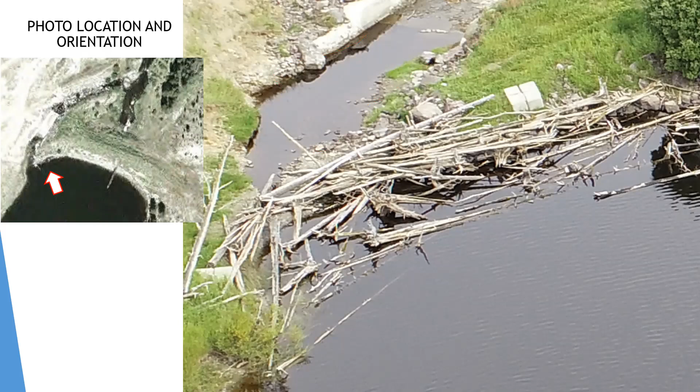Our potential flow. Lack of riprap, right? We saw those drawings, it showed like a nice thick patch of riprap all around, if we remember our drawings, and we would have that attached. Riprap too small, right? That's what someone mentioned, Billy. Is it big enough, right? Is there something on file showing the size of riprap is appropriate?

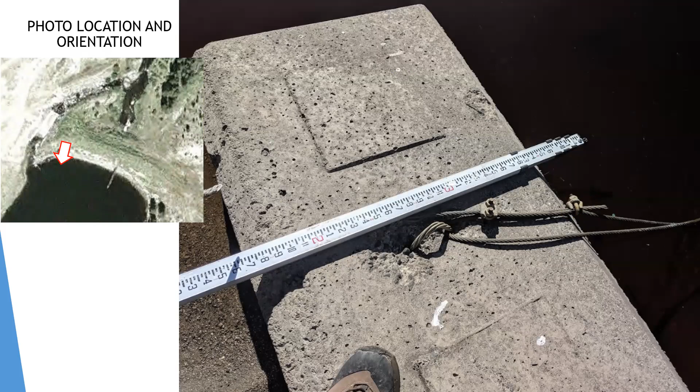There's kind of our connections. I hate these things, I see them everywhere. They often just pull off as soon as you're in a heavy wind or ice loading condition, high water. So you definitely want to make sure, it's one thing to have your cable spec'd appropriately, but you want to make sure those connect properly.

We've got kind of this concrete deck, and then we've got this drop off, right? Yeah, so Billy says drop off. We've got some, it's a pretty good drop off, right? This could have eroded over time and maybe washed away the bedding of this riprap, and now it's dropped down.

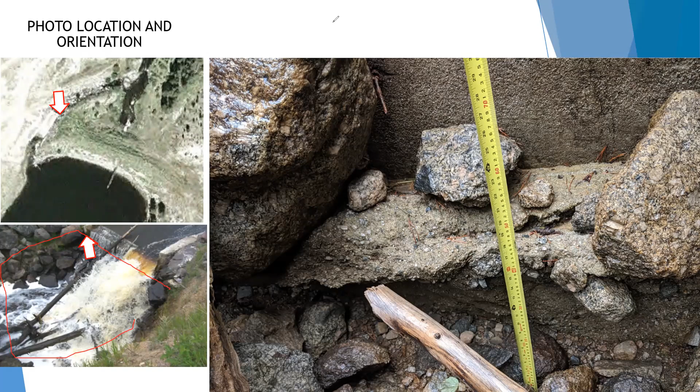I'm of the mind, you're all mentioning it, that this kind of upper section of the conveyance section has been eroding over time, right? And so we've got a bit of an issue there. And again we saw some notes on file. So this is further down, which is looking a little better, right? Nice. In the terminus section, maybe there's a little bit of backward eroding from the plunge pool forward.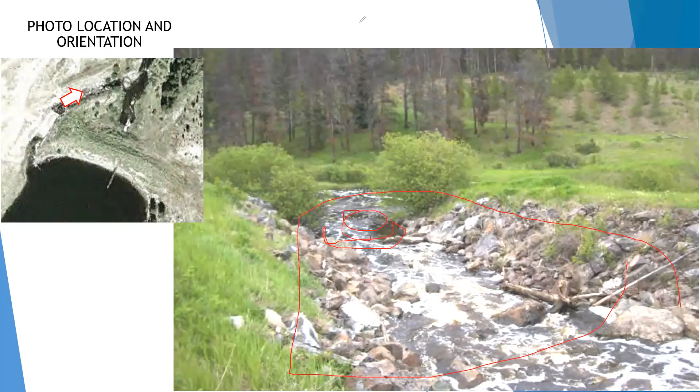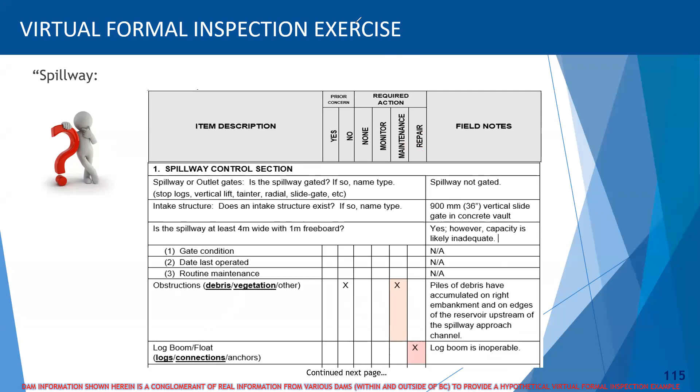So we've got some things on the spillway which we've all talked about. Debris, maintain, right? We got to maintain that. Log boom, it's inoperable, that we need to fix. Pretty easy stuff. Concrete surfaces, we're just going to give it kind of a repair fail across the board.

So yeah, lots of issues there. And I would say even that concrete, with that little metal thing you kind of ping it around, some voids could potentially be underneath it, right? So eroding or back cutting on the channel. So oftentimes anything that could be potentially hazardous or really concerning, right?

We've read that the spillway might not be sized appropriately. We looked and the catchment size was pretty big. The 1 in 100 year notes that were on file was a pretty big flow, and it was sized for a 1 in 100 quite a long time ago. And we've had quite a bit of changing conditions in the watershed.

So maybe these are different terms that you use in the dam safety regulation. Both of them are ones that require follow-up and regulatory noting. So you have to let your dam safety officer know if you have a potential safety hazard, which is something that could lead to a problem down the road or could lead to a failure of part of the dam.

This is hazardous conditions, something that's already kind of failed. So we already have, in my opinion, a failed conveyance channel, but it's still kind of potentially hazardous to the overall spillway. So I would probably put it in one of these categories. So it would require follow-up so that that recommendation isn't just a recommendation, but a recommendation that requires regulatory follow-up.

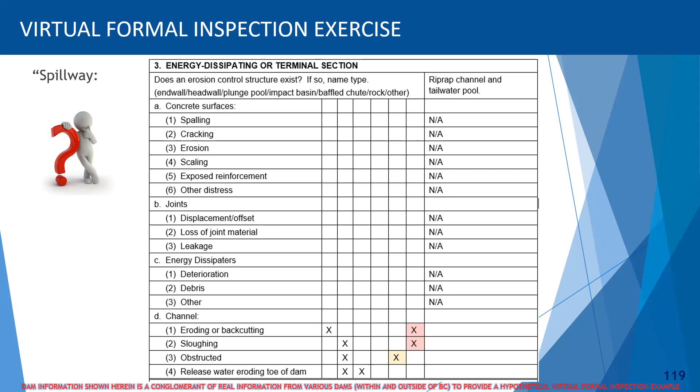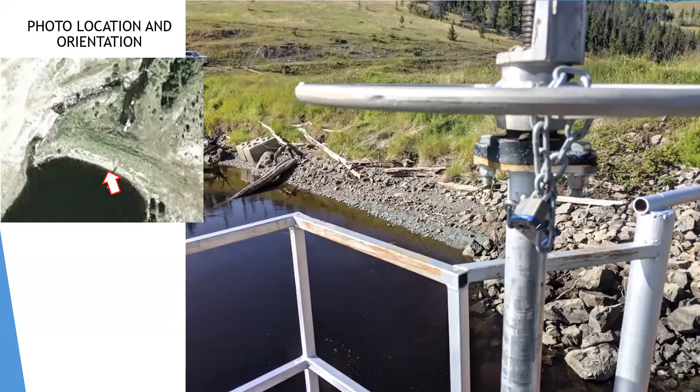But the last thing is a low-level outlet. We can look at these things. We can gate test it. We want to make sure it's locked. That is a requirement, so that's a check mark. We can measure this so that we know what the opening of the valve is.

You can measure down to the water elevation. You can read it there. You can also do it on the outside of the vault because you will have some head loss across the gates, so you can actually get a more accurate elevation of the reservoir by looking on the outside.

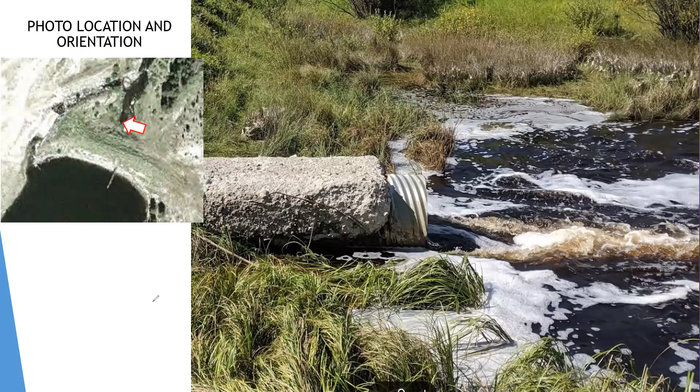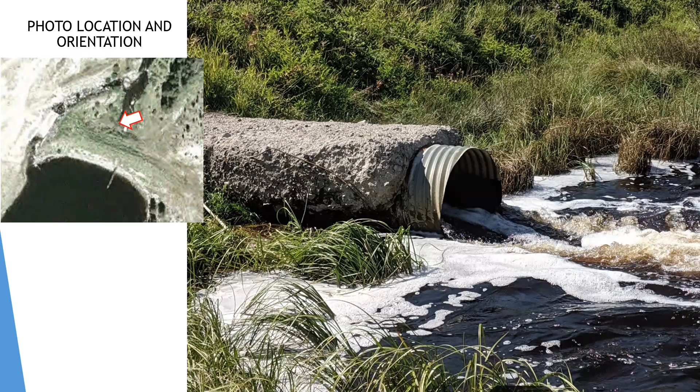Again, we see a little bit of undercutting, a little bit of erosion, maybe an endwall or like a head wall or something would be better here, certainly because it's so close to the toe of the dam. Because we had overlapping photos from the downstream slope, right? We've got potential issues, or not issues per se, but certainly risks to the dam, and we are looking at it.

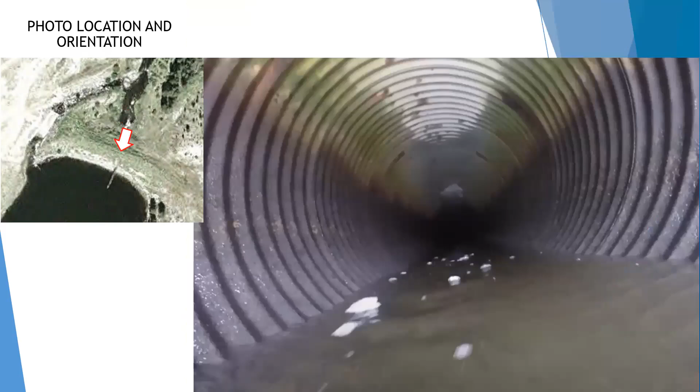So I don't really like CSP in a pipe, but CSP certainly does work. It just doesn't have as long a lifespan. And you can bring a GoPro or a pipe camera or something, you could also do that. So here's just some photos to see what a pipe through a dam like that might look like and have some issues.

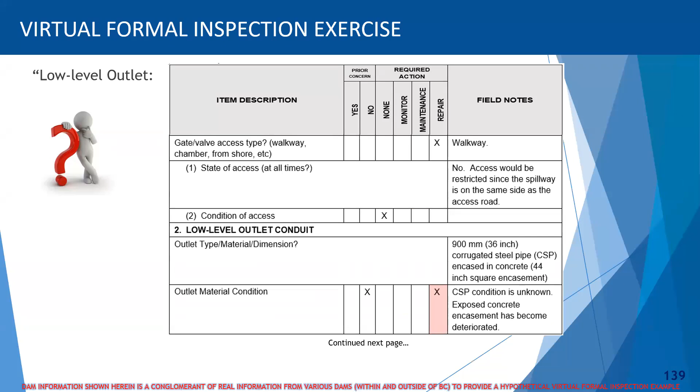And just running through here, low-level outlet structure, that's something we probably want to do. So these are just some examples of how you want to document this stuff and give yourself follow-up.

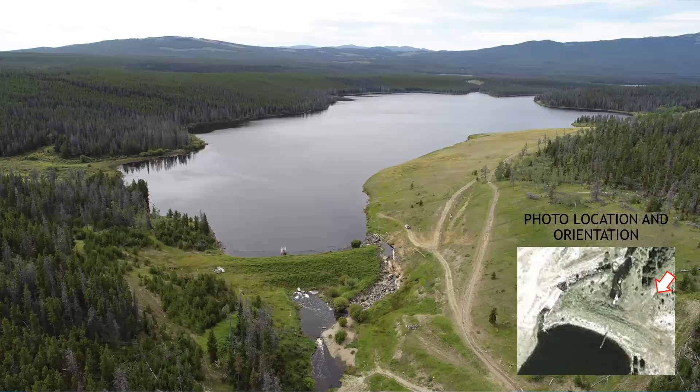The last thing is reservoir control. We really don't have anything to really speak about it. Moderate slopes, no real major hazards except for wind and wave. Certainly some debris whenever you have something this big. Water is going to naturally go where it's released into the spillway if the log boom's not there.

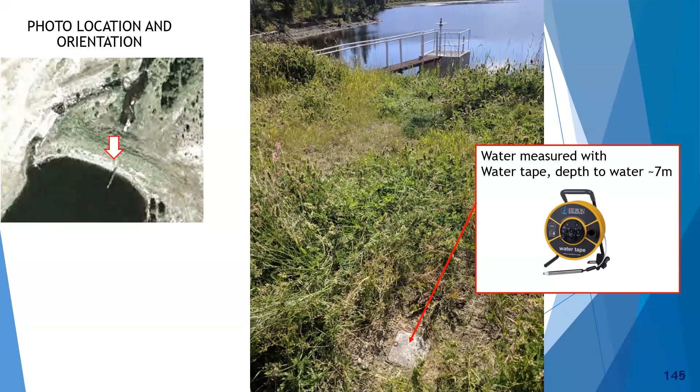And then finally, the instrumentation, it was in good condition, so we didn't really have any issues with those pieces of instrumentation. One thing, we didn't have any seepage monitoring there, drains or V-notch weirs, so those are something we're going to want to recommend and add to this dam.

So summary of takeaways, right? And remember, the idea is we've identified and made the records, and we've got all those boxes checked on the dam safety regulation. But we want to summarize those things so we can follow up on them. So the rest of that circle that makes up our dam safety management system needs to be closed, and so we need to write these things down and then initiate follow-up.

So veg management, access across the spillway, we've got potential stability issues, slumping, we're not sure, right? But those are things that we've identified could be an issue. So we want to keep monitoring those, and the degree of the things we need to do here is going to vary.

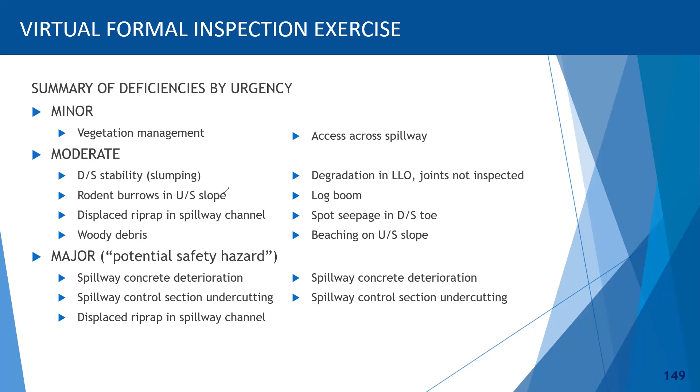And the major one is the spillway. The spillway is something we're going to want to follow up with the regulator and make a plan for. So again, the goal of surveillance is to identify deviations in performance so that corrective or risk mitigation measures can be implemented. So you got to follow up on maintenance and repairs, because that is a different but essential part of your dam safety management.

Here's the thing, if we don't follow up - this particular dam did have a failure of that spillway. We only saw about 1 foot of water in that spillway in all of our freshet conditions, but under a major event, this dam had 5 feet of water going through the spillway. So let's say it was in the area of a 1 in 200 year flood, double what the design was.

Oftentimes designs don't really think about the tractive components and things like that, and only size them appropriately for a 1 in 100 year event. And it could have been out of date - their 1 in 100 year data back then could have been very inaccurate. So the spillway was compromised and failed.

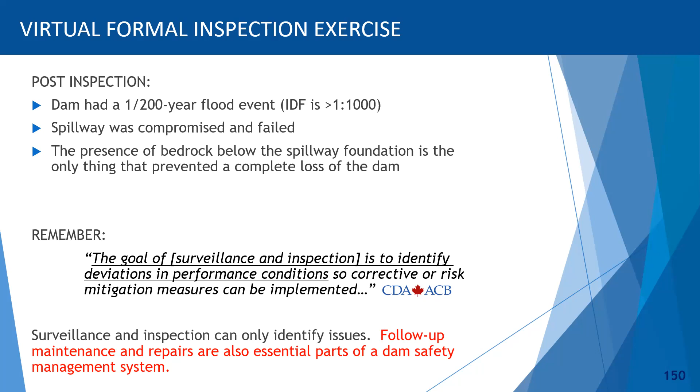Imagine 5 feet of water going through that thing. It would be quite a terrifying event if your livelihood was on the line with something like this, or you could potentially kill someone if this failed. It's a high consequence dam, so we need to follow up.

We've got to think about major events, and that's what our dams are designed for. We need to be inspecting them, thinking about these major events, whether seismic, extreme wind, and so forth. There was a little bit of debris in here that could have caused failure, but the owner was very on top of it with equipment and everything on site, mobilizing riprap and so forth, and many repairs have been done since.